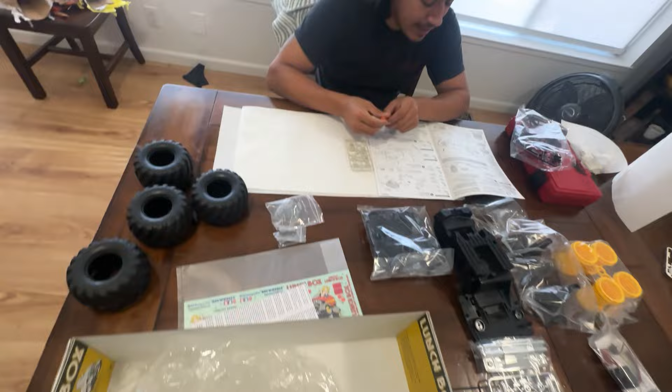So we're gonna start with this little servo here. Obviously, this is my own servo that I supplied. Thank you, Mike, appreciate you for the servo. So yeah, we're gonna go ahead and start putting the servo horn on. Let's get to it.

Recommend some pliers, that way it's easier to cut the parts from the parts tree. So here's the tub, servo's mounted in, there's the nice servo horn right there, and the body mounts.

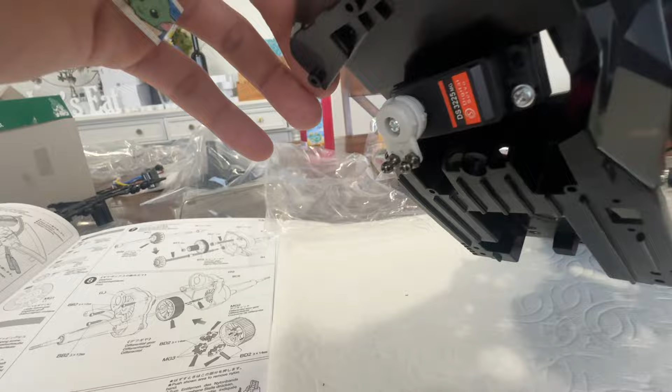So we're gonna go ahead and start building the rear diff. What's nice is they include some Tamiya grease, and they kind of just tell you where to place it. It's pretty straightforward here, very simple putting it together.

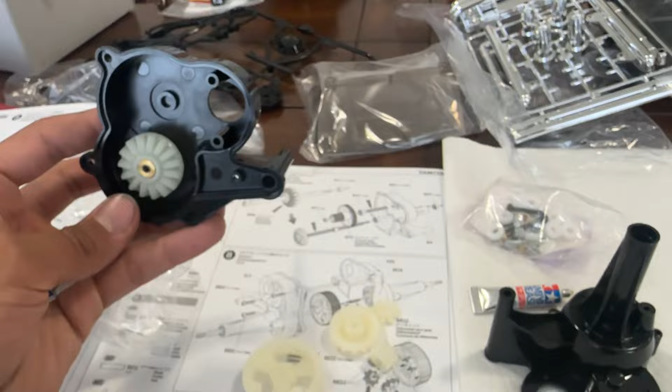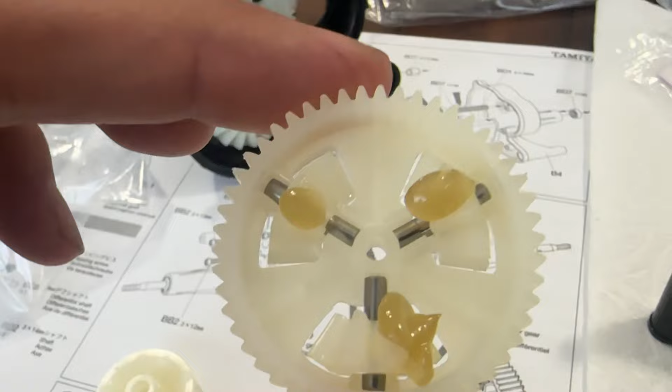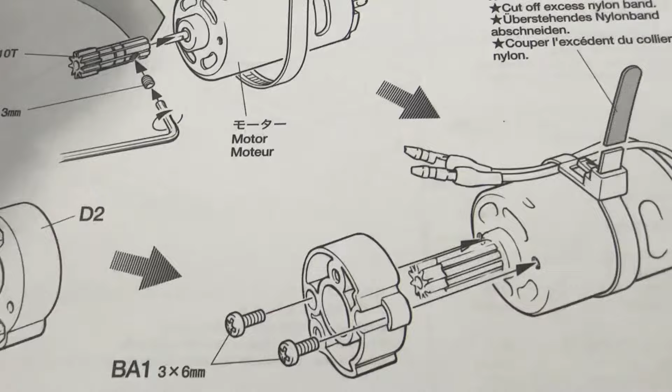One thing to note is the way this thing stacks is you got that gear goes first, then you slide in this guy right here. Then you're gonna drop in all these three little spider gears, I believe is what they're called. Drop a little bit of grease on them, there they are right there, and then you just kind of put it in the middle and slide both cases together.

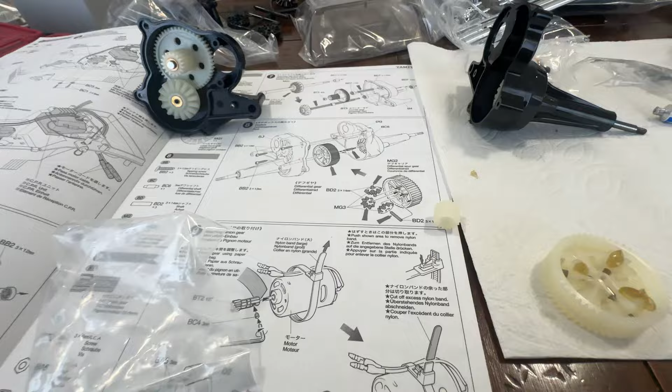Actually, I stand corrected, there's this little piece here found in bag C. If you look closely, make sure you put that in, I almost forgot it. What that'll do is it'll slide through there. It connects in between that one and that one right there to help line everything up. Make sure you put a little bit of grease on it.

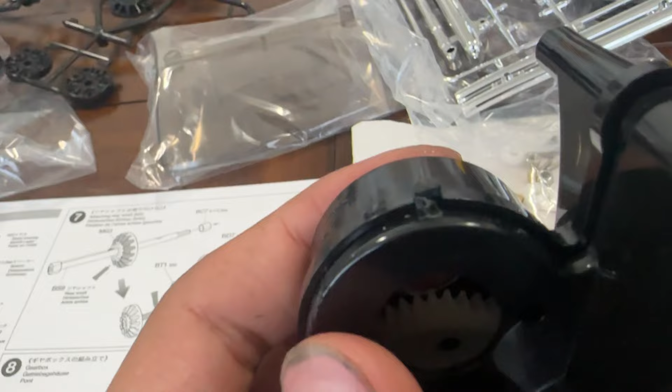So you'll pretty much drop her in like this here, and we're gonna grab the other half and slide them together. Tip: make sure you get all the plastic bits off. Right now this is interfering with me being able to slide the two parts of the case together, so make sure you always clean your edges off.

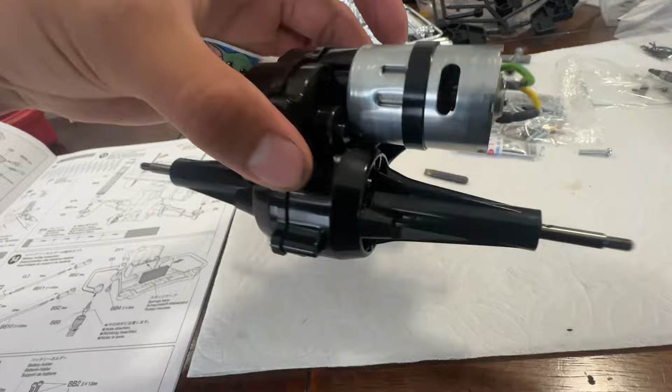Now that the case is all put together, we're gonna go ahead and spin it. As you can see, gears spin nice and smooth. So now we got the motor bolted up here to the transmission, or transaxle technically.

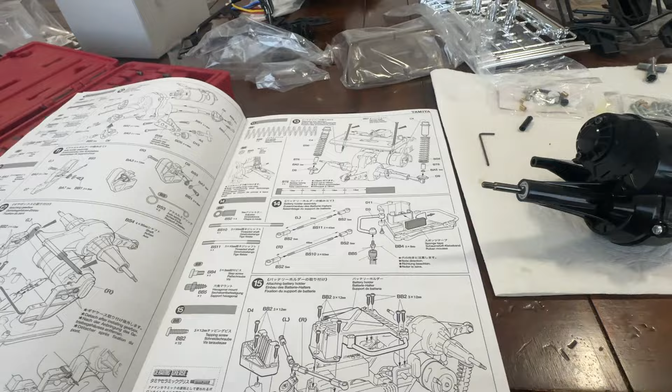So yep, just keep following the instructions and working the way down. Very straightforward, pretty simple. So here's the body, but before we paint it, we're gonna definitely want to wash it.

Now the color paint we're using is this nice TS47 Tamiya yellow. It's a chrome yellow, kind of doesn't -- they say it's a little bit less of a bright yellow. It's kind of more like the box art, they said. So I'm going to try it out, see what they say. We're going to end up doing about 3 cans, so we'll see how much we'll throw on.

So let's go ahead and get to painting. Now we're going to mix up the paint, and we've got our special painter here who's going to paint the body for us.

Kind of lay this easy coat on. Again, we don't want this paint to drip. Obviously it's very splotchy right now, but as we paint, it'll all even itself out.

So Paul, you want to tell us about that tattoo there? Yeah, last night there was a little party thing, so Alyssa put some butterflies on me.

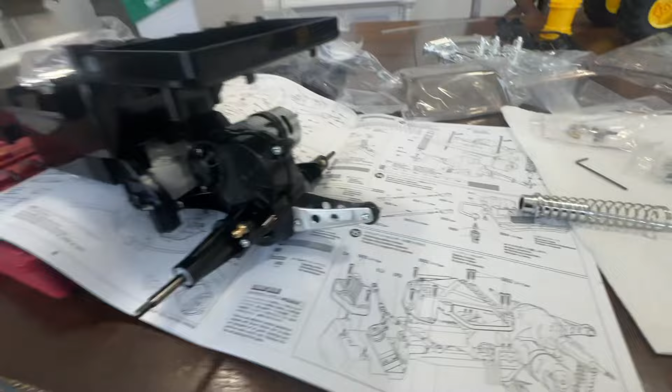So the rear end is now on the chassis. We're gonna build the shocks.

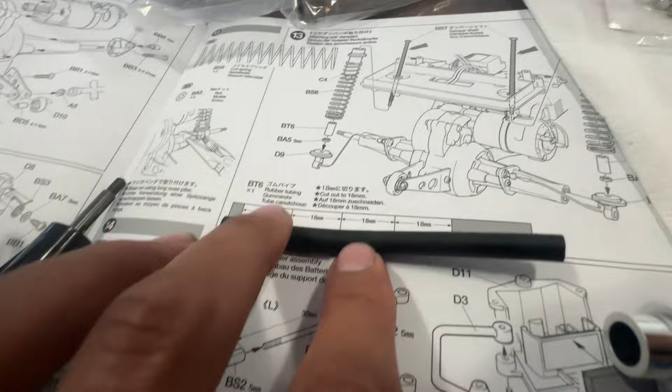Here's the tube, and they say you need to cut each one to approximately 18 millimeters because that goes on the bottom of the shock right there. Very simple, just line it up, cut it, and then just follow the diagram how to put it together.

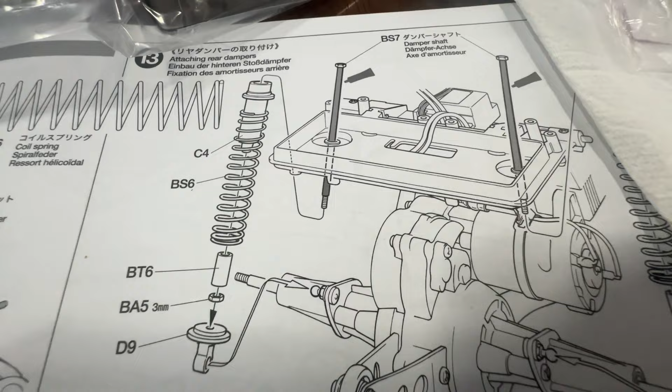Now these are friction shocks, so you'll just put some grease in there. They don't have any oil in them, so pretty basic.

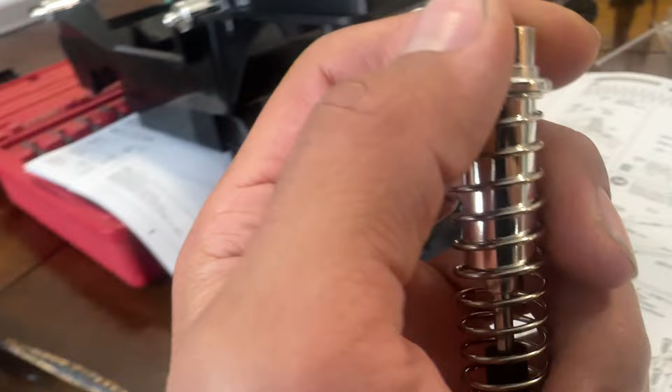One thing I like doing is while I'm assembling, I'll take a few breaks and go paint the body. As you can see, the body is now painted, so I'm going to set it to the side. Another tip I have too is I built the shock and I was like, oh, where's the shock top?

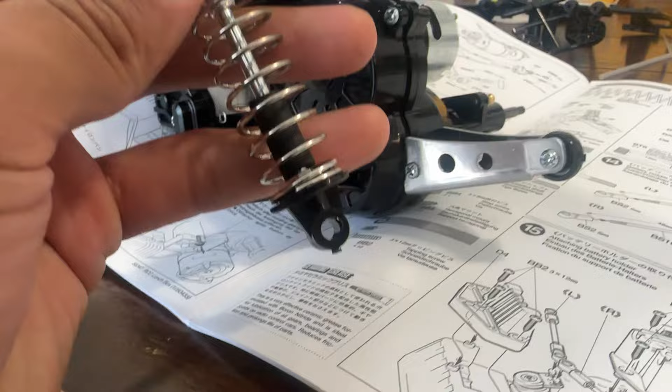I realized I was supposed to pass the bolt through and have the shock be on there. So make sure you first slide the bolt through and then assemble the shock. Don't assemble it on the outside, because then you don't have a way to get it in.

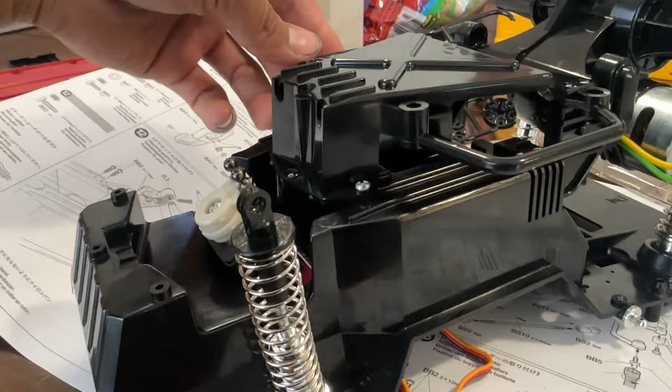Here we got the battery tray portion put on. It's actually pretty cool, you can see it just kind of pushes down like that and swivels. A body pin will go in there to hold it. It's coming along pretty good.

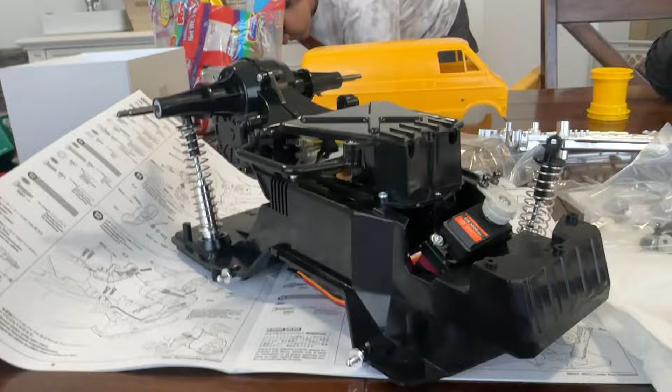Now we begin on the front suspension arms. Here they are, I'm gonna get this front end put together. So here we got the front suspension on, steering's hooked up. Obviously we'll have to center up the servo.

It's coming along pretty good. What do you think, Alyssa? I think it looks amazing.

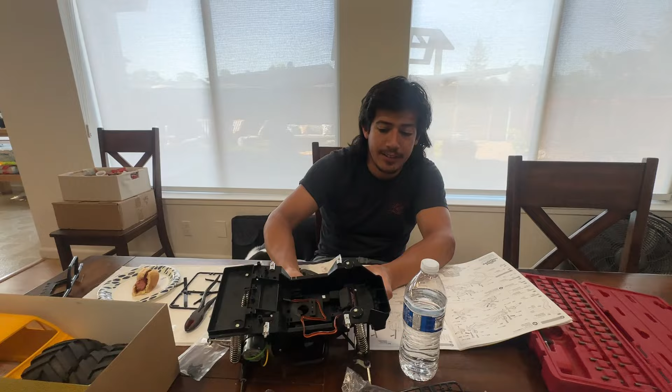So we're gonna continue on with the build. Wheels are pretty straightforward. As you can see, this one goes on the back, and this here is a front wheel. See how it's rounded, it takes a bushing. Anyways, they're directional, you want to make sure the V's are pointing forward.

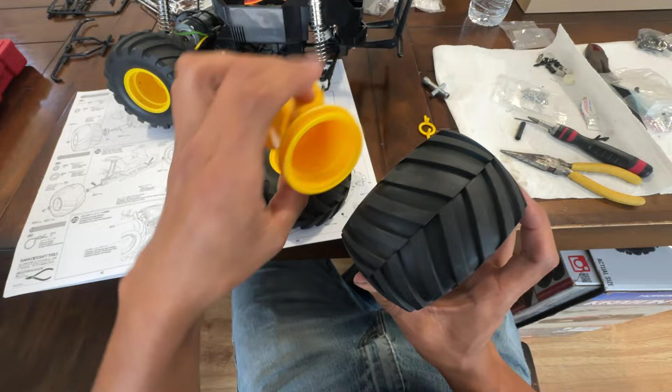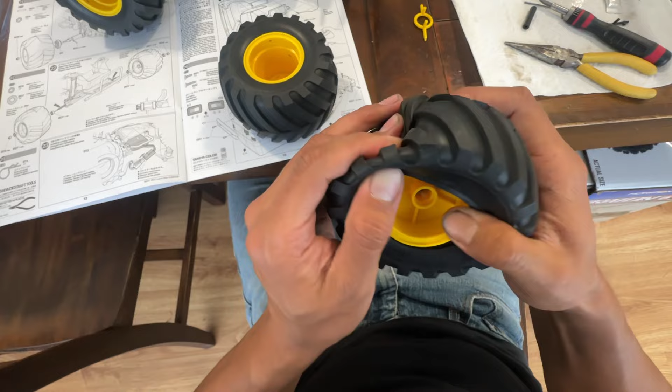All you do is simply slide your wheel in through and make sure you get your bead right here, and that's it. This process applies to all four wheels, front and back. You just work your way around. It's nothing super hard, you don't want to push it too far back like I did there, but you just kind of work it - you seat that part, then go to the next side. You just run your finger around to get it to slide in there, and that's it, very straightforward.

Then you're just gonna pop some bushings in up front. So bushing, you just kind of put it like that, and you're gonna have another bushing on the other side. Pop that guy in.

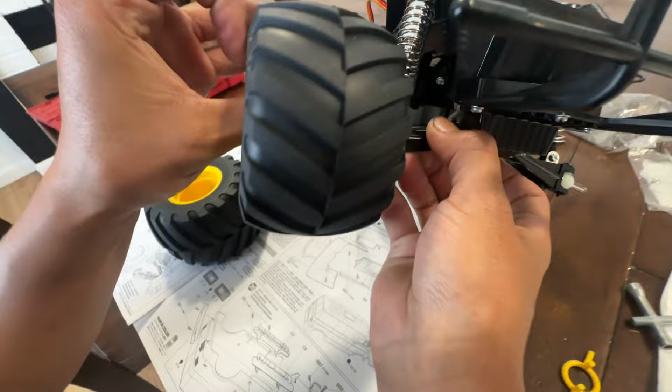Get a little bit of this Tamiya grease here, apply it like that, then go ahead and slide her all in. Turn it on its side, then grab the nut, get it started by hand here, and we're gonna go ahead with our tool.

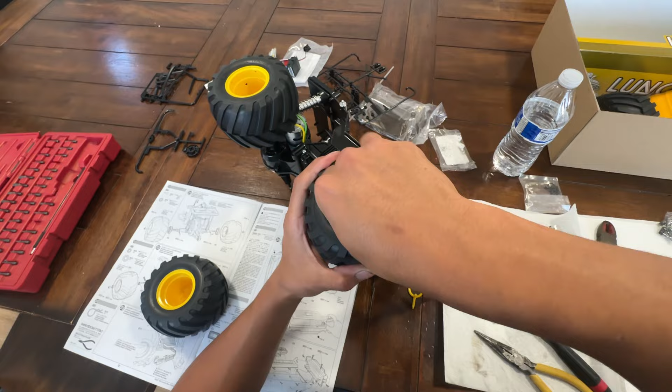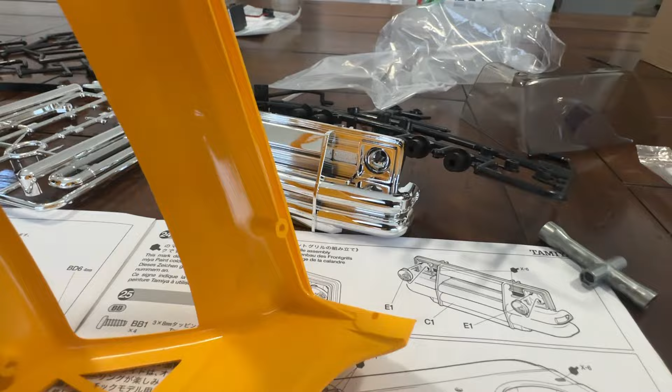Go ahead and tighten it up. Now it's the fun part - we are installing the glass. I'm gonna put the little lenses up here on the grill too. So much fun, this is my favorite part of the build, to be honest with you.

So here's the body, now it's just ready for the decals. I know the side markers and the little trim around here can get painted, but I'm gonna choose to leave those alone as I don't have those paints or that brush. But yeah, not bad considering this thing's gonna get all scratched up anyways once we drive it. So I'm gonna go ahead and apply the decals now.

There it is, the Tamiya Lunchbox. Came out really good. So we ended up using that chrome yellow paint because, as you can see, it looks pretty close to the box art.

Now if you notice on the box art, obviously the wheels and the body match. Here on the model they do not match, because the paint that Tamiya recommends is this shade of yellow to go on the body, and I don't really like that shade of yellow. It's just too yellow, kind of looks like construction equipment. Don't really like it. So we're gonna end up tearing these wheels apart and shoot them with the yellow paint so it matches the body, and I think it'll look a lot better.

But overall, super fun build. So this here was a little build video. I wish I could have filmed a little more of it, but due to technical difficulties with tripods and phone mounts and camera mounts, it wasn't as possible. But stay tuned for the running video - we're gonna go ahead and drive this thing and scratch up this pretty body.